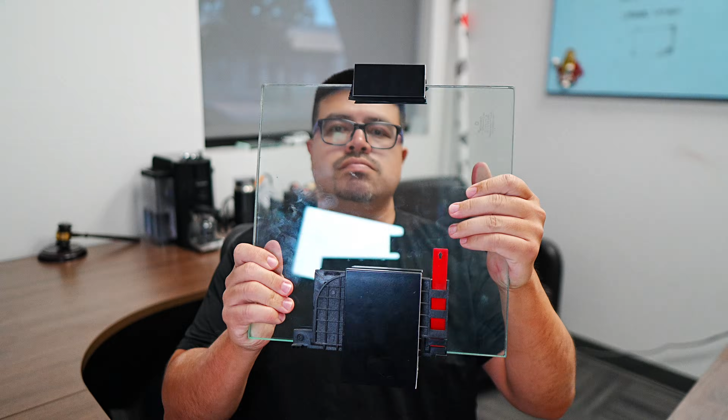All these parts are by Q Railing, including the fascia mount base shoe, top cap, vinyl, and accessories, including the Q disc. So the Q disc is this little device inside there that allows the glass to be seated in the base shoe without any adhesives, and it allows the glass to be secured from the inside, which is good when you're on a rooftop. It allows for tilt and height adjustability, which is huge.

Typically, we like to measure and order the glass and hardware all in one shot, whether it be base shoe or standoffs or post. But in this case, we opted to install the base shoe first and then go back to measure the glass second, because the base shoe had to sit about 3/4 of an inch off of that fascia, and I had no idea how many waves were in that fascia, so obviously that was going to affect the final location of the shoe.

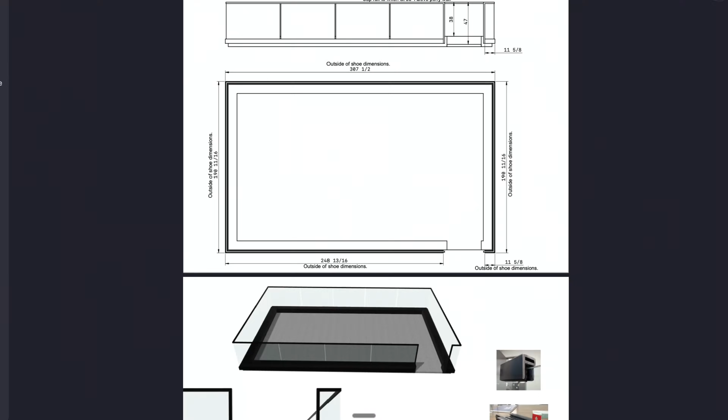Now luckily the base shoe was installed perfectly level, so this should be relatively quick and uncomplicated. But what's cool about doing it this way is that the measure is relatively easy in the field. So we opted to measure outside dimension of base shoe so that I can build it from just that information backwards inside of Shapr3D.

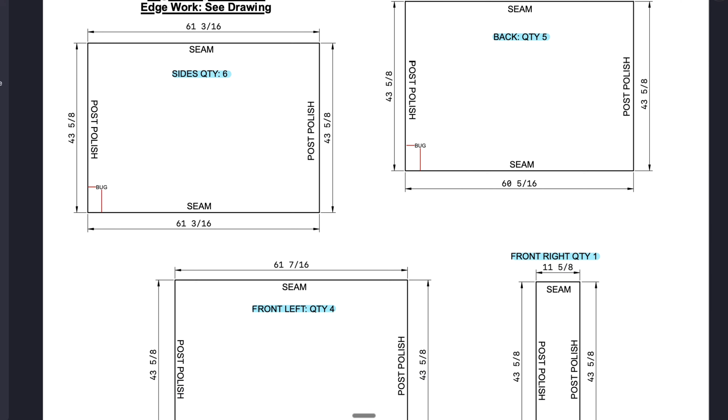Before we get started, I just want to reiterate the importance of shop drawings. Shop drawings are especially important on something expensive like a glass railing because they dictate important details that should be signed off on ahead of time, so that in the end, if there's a problem, you can point back to the signed approval. And furthermore, the shop drawings act as installation instructions, and we try to design them in such a way that can be easily understood by the guys out there on this high roof.

When I design these shop drawings, of course, I'm going to break out each and every panel individually so that when it is approved, it should be ready to order. All right, let's get right into the modeling.

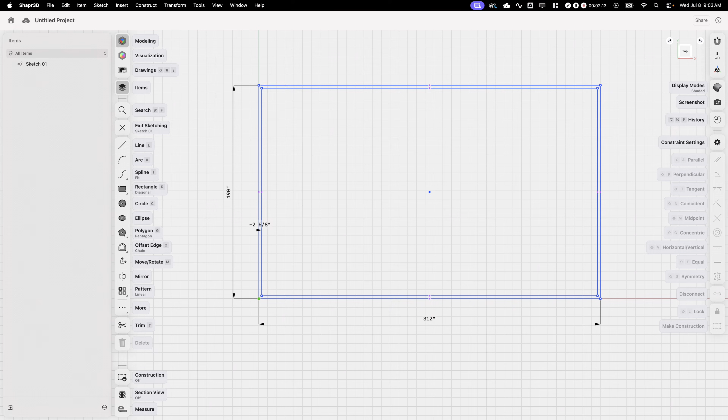The first thing I did is I started with the outside dimension of the base shoe, which is already installed, and I just simply draw a rectangle, and then, looking at it from a plan view, I use the offset tool to offset that overall dimension the exact width of the base shoe. Now with Shapr3D, it makes it very easy to just rotate and extrude and cut things, which is essentially what drawing is. And when you have nothing but rectangles, it's super simple.

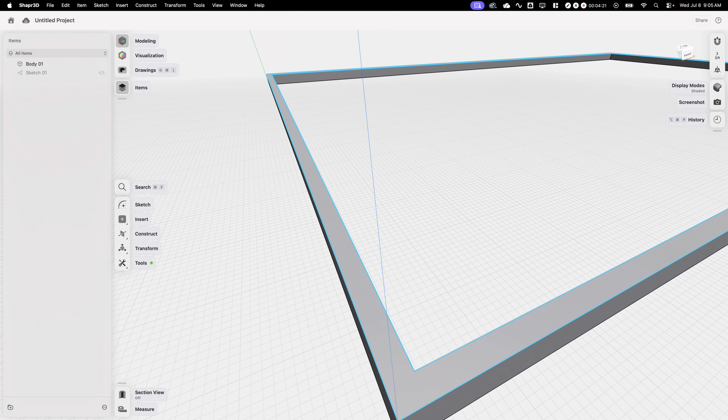So I draw the profile of the base shoe from the top angle, I rotate the screen, and I'm able to grab that shape and extrude that base shoe the exact depth that it is. So then I have the full profile of the base shoe. Second, I can put my cursor on the top face of the base shoe, hit the space bar, and Shapr3D is going to start a new sketch right on top of that plane. It's going to normal to, which means it's going to give me a perfect scaled view of that area.

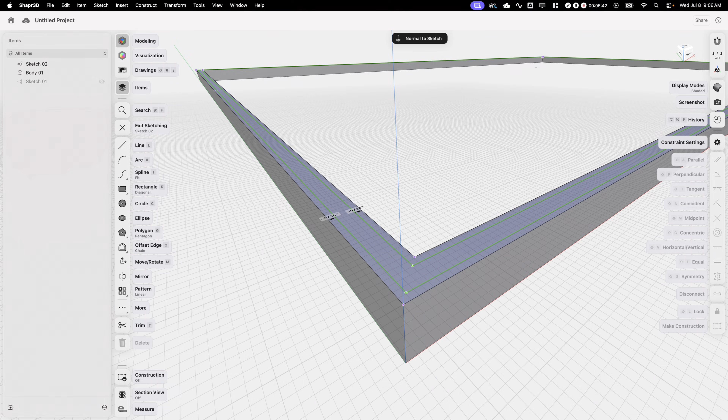Now what I like to do then is offset the walls of the base shoe, come in a little bit, and then offset the exact wall interior thickness of the base shoe. And then from there, I can do the same thing. I can rotate my screen, I can select that, and I can extrude it down the exact depth.

Now this is where having the glass in hand comes into play. Obviously, you can work based off of drawings, but I'm a visual person, and having this sample made as I make this drawing is a huge help, because I can literally take my tape measure and measure from top of base shoe to bottom of glass, and I can determine exactly how far the glass is going into the base shoe. And I also know from my measure the exact distance from the top of the base shoe to the top of that little pony wall.

Now the pony wall, it's about 9 inches thick, and so we need to make sure that the finish is more than 36 inches from any point where you can stand on. And if you can stand right next to it and it's less than 36 inches, then it's not going to pass code. So we opted for a 38-inch overall height for our glass railing, including the top cap, which is actually going to be about 47 inches above finished floor from the walking on the pavers down below.

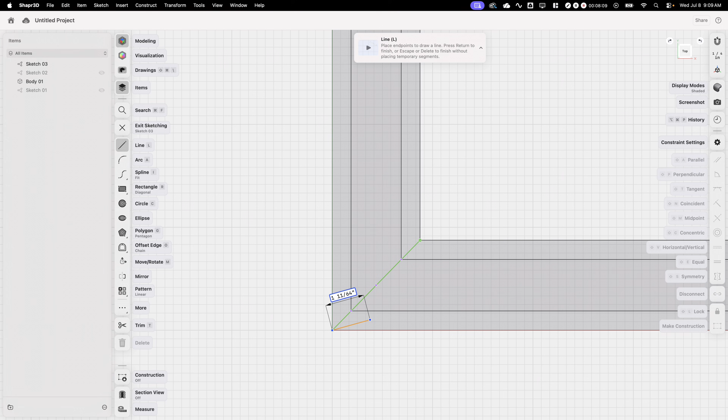I can start a new sketch plane on top of the base shoe after I already have my information. In other words, how much I'm going to extrude the glass up and extrude the glass down. So using center lines, once again, very simple, very basic inside of Shapr, I can utilize a geometry that I already created. I'm just simply going to create diagonal lines connecting all the corners. I'm going to make those construction lines so they don't interfere with my drawing, and then I'm going to use that to reference my center line, and I'm just going to draw a square connected to opposing corners.

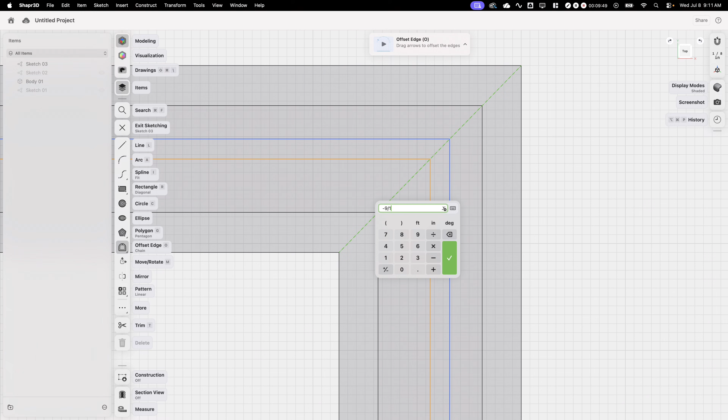And then from there, I'm going to go to the offset tool again. I'm going to offset the glass thickness, the thickness that I need, which in this case is 9/16 laminated glass. So once I have the profile of the glass drawn, looking at it from the top, I can then rotate it to the side. I can grab that shape and I can extrude that glass down the exact depth that it's going to go into that base shoe.

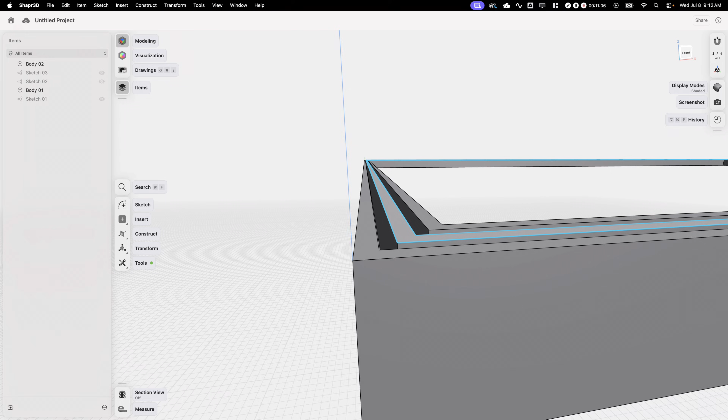When I'm done with that, inside Shapr3D, I can touch that top edge of the glass and I can extrude it up the exact height that I need. Now the height that I want is going to be taking into account this aluminum cap rail, and having the cap rail on here is really helpful because I can just take my tape measure, stick it on there, and I can determine the overall height of the glass.

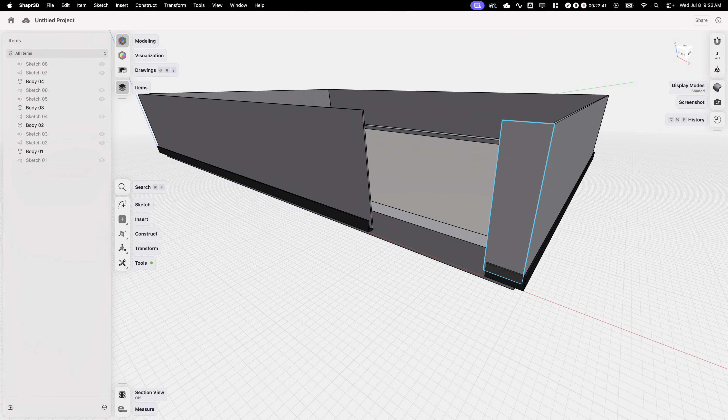So once I have my glass the exact height that I need it, I can go ahead and come through and I can cut out the pieces of the base shoe that aren't supposed to be there where the walkway to gain access is. At the same time, I can cut the glass away so that I'm left with just the shell of the glass.

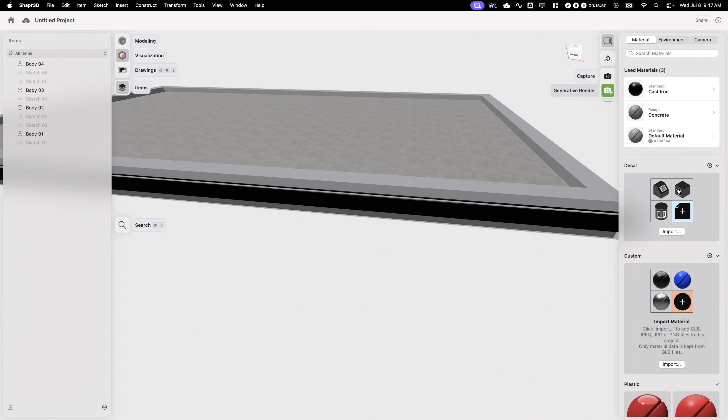Now, in the middle of drawing or periodically as I'm drawing, I'll jump over to the visualization tab and I'll make the parts look the way they're supposed to look. So in other words, I'll make the base shoe look black as I draw it, or any parts that are supposed to be black, I'll just make them black as I draw them. And then the glass, before I do anything to it, I'm going to assign it to look like glass, so that when I go to the visualization tab, the glass is transparent, which is going to be nice for the shop drawing down the line.

Now, after I've done this, I'm going to go back to my modeling, and from here, I'm going to determine the glass panel widths. Now, I do manual calculations as I go, just to make sure I'm not doing anything twice, but sometimes it happens. So I just need to determine the panel width for each one of these runs. I'm shooting for a panel width between 40 and 60 inches, and I want a width that's going to be consistent on all four sides. All four sides are not equal, so I'm going to find the best balance.

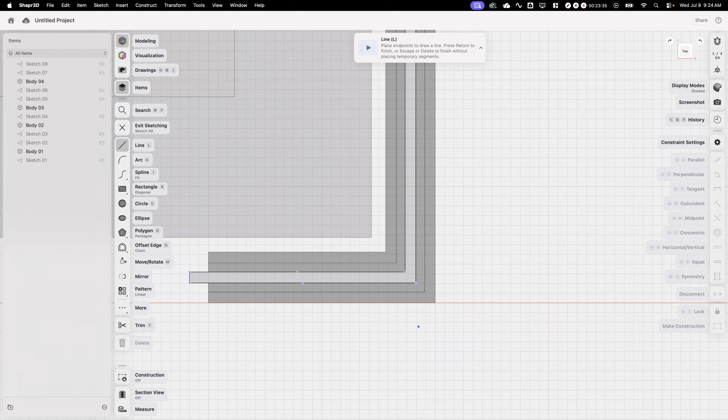Once I've done that, I'm simply going to start a new sketch plane on top of the glass edge, and I'm going to draw rectangles, lock the ends, and draw basically rectangles that are going to simulate the gaps. So what I'll do first is I'll extrude the corners out so that the glass overlaps, and in this case I want the glass to kind of overlap like this.

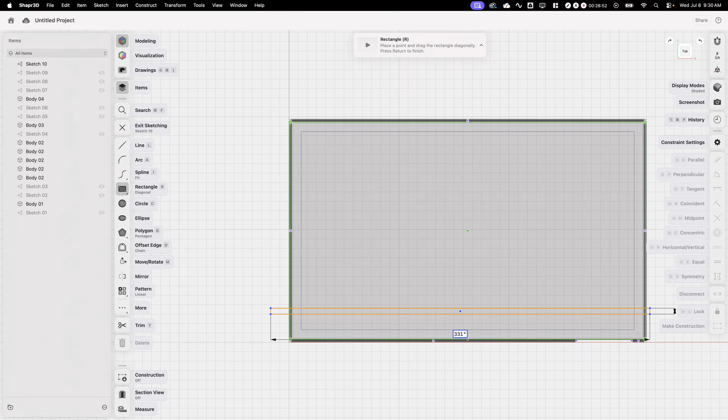So the first thing I'm going to do is cut the corners out so that I now have 4 individual panes. So these are the individual runs. So now once I've done that, I can go through and I can start selecting the top of each one of those runs and splitting them into individual panels.

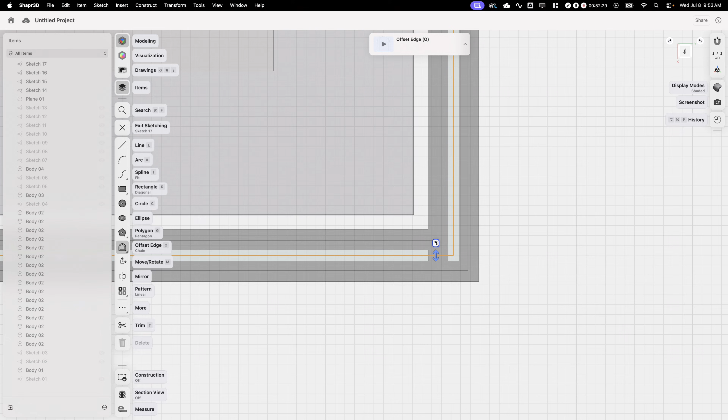Now, once I've done that, I can go ahead and start a sketch plane at exactly 38 inches above the pony wall, and I can start a new sketch so I can draw in the cap rail, right? And again, because I have the cap rail in my hand, it's really easy to just put a tape measure on there and draw it as I go. And I'm going to start from the top down and extrude it so that it creates the cap rail. And again, it's going to be all 4 sides.

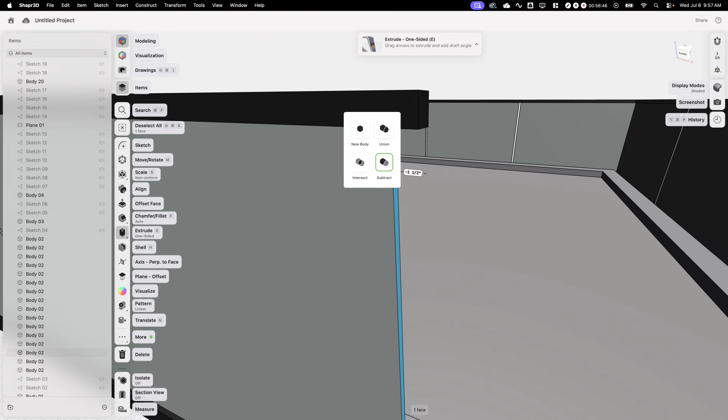So I'm going to come back through and I'm going to create another sketch plane on the face of where it's not supposed to be. I'm going to go ahead and cut that out, and then I'm going to finish the cap rail going down the sides of the glass, because the cap rail not only goes on top, but it's also supposed to go on the side all the way down to the bottom of the fascia mount base shoe.

Now, once I have all this completed, I need to design the cladding. So we like to do things a little bit different in the glazing industry. Most base shoe comes with the cladding already, and the cladding is designed to essentially come up to this point right here of the base shoe, so that it leaves room for that vinyl. But we think the vinyl's ugly, and so we prefer for the cladding to actually almost touch the glass, so that eliminates the need for vinyl altogether.

So I'm just going to double click and copy the base shoe and glass section. I'm going to move it off to the side. I'm just going to cut out a little section of the base shoe. I'm going to normal to one side, and from here I can design the cladding exactly the way I want it to be. And the cladding is actually being provided by the roofing company, so these drawings are actually for them to make their cladding width. Luckily, they're going to clad it for us. All we're doing is the base shoe, glass, and top cap.

Now, I've done all the heavy lifting on my Mac using a mouse and a keyboard and a big screen, and that's huge, but all my shop drawings usually end up inside of GoodNotes for iPad. I don't know what GoodNotes we're on, maybe 6 or 7. By the time you watch this, it might be on GoodNotes 100, so I'm just going to say GoodNotes for iPad. So if you didn't know, Shapr3D also works on an iPad.

So usually the first thing that I do is I'll close the model on my Mac, let it save. I'll then open exactly that same model on my iPad. And then I'm going to go to the visualization tab, select the transparent background, and I'm just going to rotate my view angle around to try to give an overall aesthetic vibe of what it's going to look like when it's all said and done. Simply hit capture, and those images are saved into my camera roll.

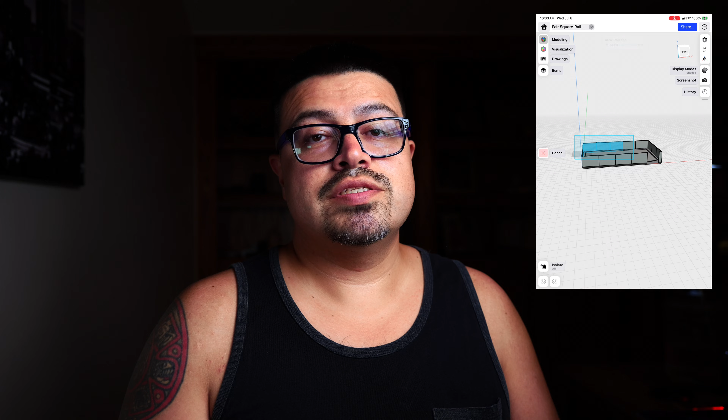Next, inside of Shapr3D, using just my iPad mini and my Apple Pencil, I'm going to go ahead and create a new drawing. I'm going to just go into Shapr, click the new drawing button, and then it's going to have me select what I want it to make a drawing of. I'll just simply drag and highlight the glass railing, of course, because that's what I'm drawing. And then I'm going to hit next.

I'm going to choose my sheet size, which is ANSI A, or maybe just call it sheet A. And that's because that is a standard 8.5 by 11 document. So eventually when this gets printed and stapled onto a job ticket, it's going to fill up the whole page. And most PDF documents are that size. So I try to stick to that as well as I can.

So I'll go ahead and bring that in, and using Shapr3D, I can give it the standard views, which is front, top, left, right, isometric. 9 times out of 10, I'm just using the front and/or the top. So in this case, I'm going to give a front view and a top view of the glass railing, including the top cap. And from here, I'm going to dimension the exterior of the base shoe to show where those dimensions came from. And then when I'm satisfied with that, I'm going to move on to the next drawing. And the next drawing is going to be of the glass itself.

So when I go to create a new drawing, rather than selecting everything, I'm actually going to hide the top rail, and I'm only going to select the glass. And I'm going to make one page just for glass. And this one is going to include the seams. It's going to include the panel widths and the overall heights, which is the true to life glass sizes as I'm going to order it.

Then the next page, I'm going to get that base shoe drawing, and I'm going to make it its own drawing, really tall, really big, really clear, because I know that somebody else has to read this drawing because they're going to fabricate their flashing to fit this base shoe per my drawing. So I just want to make it crystal clear, leaving all kinds of room. It's going to nearly touch the glass when it's all installed. It's going to look fantastic, and I'm pretty confident this is pretty easy to read.

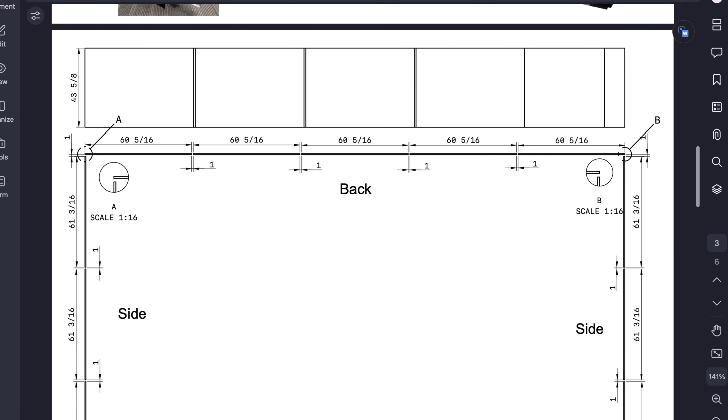And once it's approved, I can then just take that one page out of there that was the glass sizes, and I can make it a little more crystal clear for the manufacturer, send it off to the manufacturer, and they're going to fabricate it. That gets printed, stapled onto the job ticket. When glass arrives, the guys go out and install it. So this is part 1 of this project, and part 2 will be the final install.